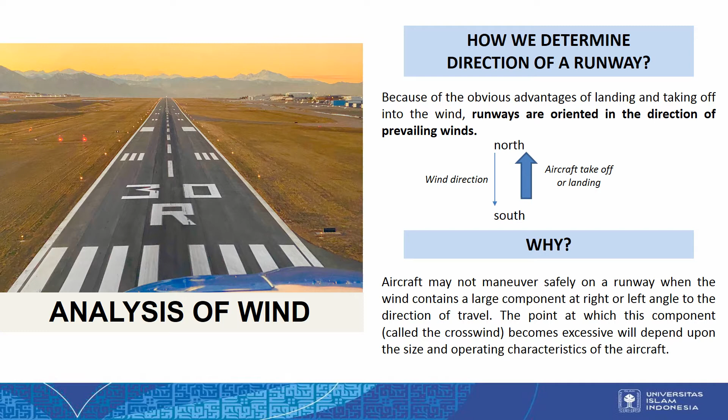And the other is, if there is a crosswind, the aircraft will not go straight in the middle of the runway or in the center line of the runway, but it will be moved to the left or the right side of the center line of the runway. And also I have a video about an aircraft landing in the middle of a crosswind, and it is dangerous.

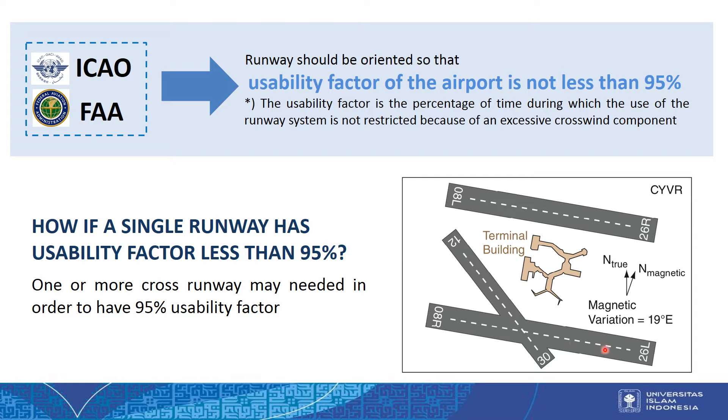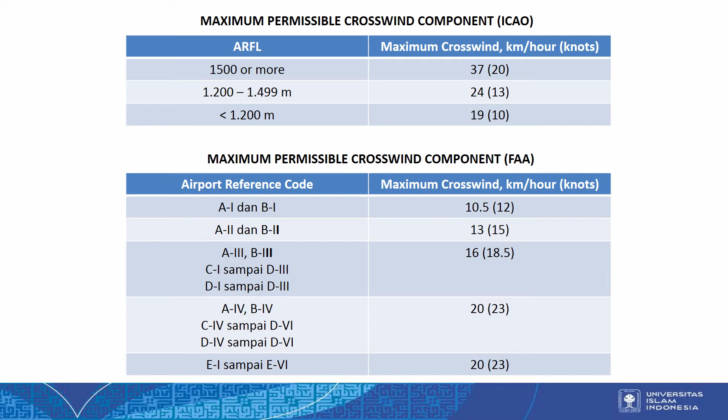Now let's talk about the wind rose definition. In the beginning of the slide, we discussed how we decide the direction of a runway. So the direction of a runway is decided based on the wind. But how exactly do we decide the direction of a runway?

So the appropriate orientation of the runway or runways at an airport can be determined through graphical vector analysis using a wind rose. A wind rose is a graphical vector analysis to determine the orientation of the runway at an airport.

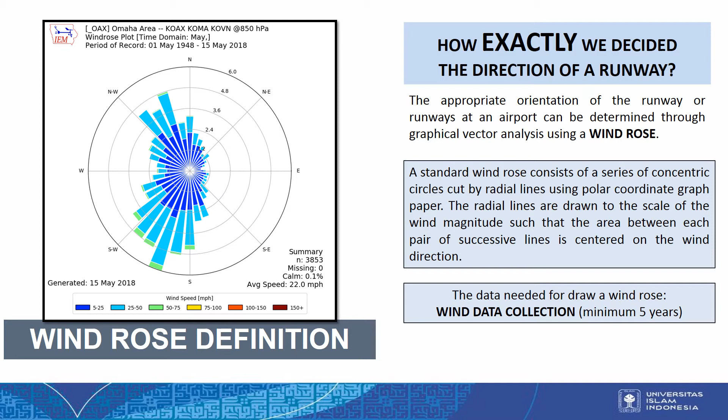So in a wind rose, normally there are 16 radial lines in the concentric circles. The 16 radial lines mean 16 directions of the wind, like here. You can see 16 radial lines here: 1, 2, 3, 4, 5, 6, 7, 8, 9, 10, 11, 12, 13, 14, 15, 16. So the 16 radial lines are based on 16 directions of the wind.

N, NNE, and etc. N means north, NNE means north-northeast, NE means northeast, ENE means east-northeast, E means east, and the others. You can see here, these are the directions of the wind.

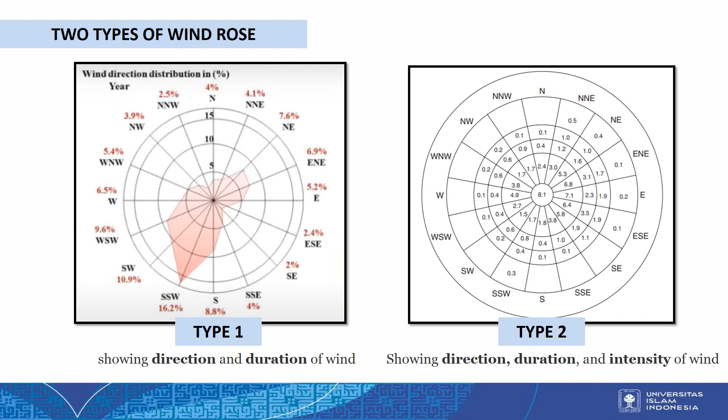So let's talk about the first type of wind rose that only shows direction and duration of wind. This is the radial line. There are 16 radial lines, and the radial line shows the direction of wind: does the wind blow to north, or to north-northeast, or to northeast, and etc. So the radial line shows the direction of the wind, and each circle shows duration of wind.

What is the duration of wind? Duration of wind is the percentage of time when the wind blows in that direction. So the total here is 100%. If we sum it, it is 100%. So the best direction of the runway is the direction with the longest line.

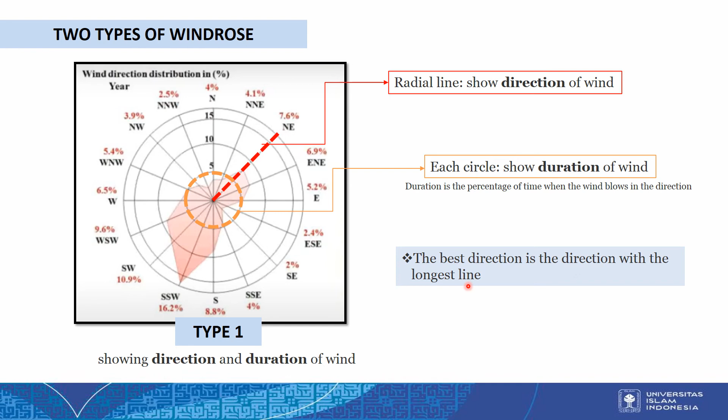And the second is the wind rose that shows direction, duration, and intensity of wind. So the second type of wind rose also has 16 radial lines that show the direction of the wind, but the difference is each concentric circle shows the intensity of the wind. The intensity is the velocity of the wind. So this is the smallest, and larger intensity or velocity toward the outer circle.

And the difference from the first type is that in the second type of wind rose there are numbers inside each segment of the circle that show the duration of the wind, or the percentage of time when the wind blows in that direction. So in the first type, the duration shows here, but in the second type, the duration shows here. If there is no number inside the segment of the circle, it means that no winds blow at this velocity in this direction.